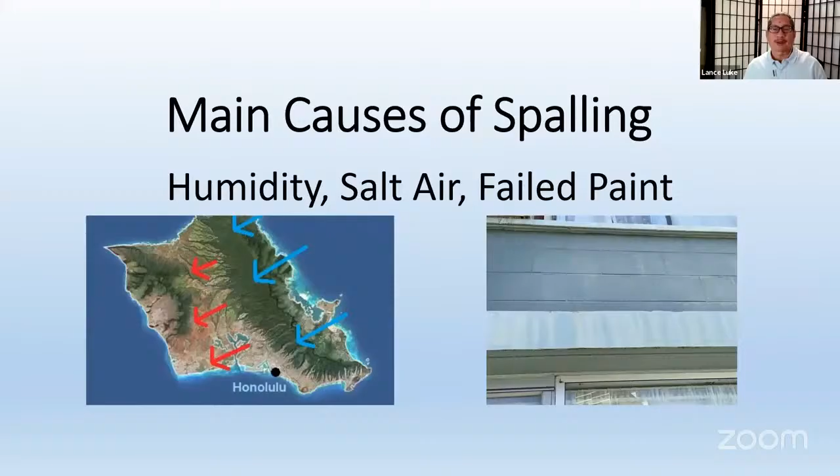I took chunks of concrete as an experiment and set it in little pans of water, and eventually the water soaked up into the concrete rocks that I had as a sample. So I'll give you another analogy: let's take a car. You have a nice Mercedes with new paint, and if there's a scratch on the paint that is not touched up, guess what? Where the scratch is, it starts rusting. And that's why full coverage of paint or waterproofing is the best thing for a concrete building.

So how do we determine whether there's spalling of the buildings, or let's say we know there's spalling, but how do we determine how much spalling there is and what the cost is to repair the spalling? So there's what's called a condition survey, and the survey is a method to determine the quantities of spalls at a particular building. And there's different ways to do surveying, and it's kind of simple in one hand, and on the other hand, it may not be so simple.

But the objective is to get a good snapshot of the condition of the building with respect to the various spalling conditions. So once all these spall areas are identified, those are all quantities, and we put all the quantities together, add them up, and we can determine basically what the cost is by the number of quantities for different types of spalling. So let's talk more about that. The inspection methodology to determine the survey condition.

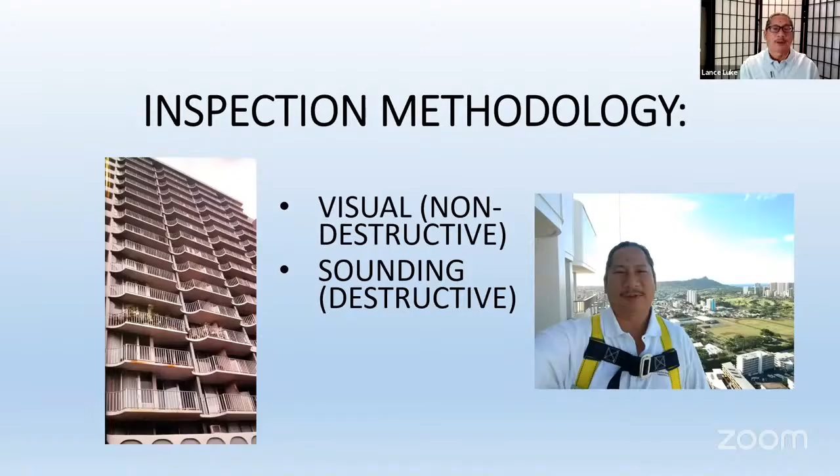So we gather all this information and compile the results and total everything and come up with an approximate number. Now, I'm not the contractor that does the work, but when I manage construction projects, I do my own estimate. So when I do get the contractor's proposals, I can gauge whether they're far off or whether they're within the ballpark based on what my own number is. So it's like a cross check. If I don't do that, I'm not going to have a clue whether these numbers from the contractors are correct or they're way off. Okay, so we're going to compile all the results and we're going to come up with some numbers.

So right now, let's take a tour of a building to see how we gather the data on spalling concrete. So this is kind of like a field trip within a webinar. So types of spalling by location. And believe it or not, there's different locations and types of spalling. And this is where the fun comes in so that you guys know what we're talking about. And when the contractor bids, you know exactly what he's bidding on and what he's talking about. And it's not Greek and it's easy to understand.

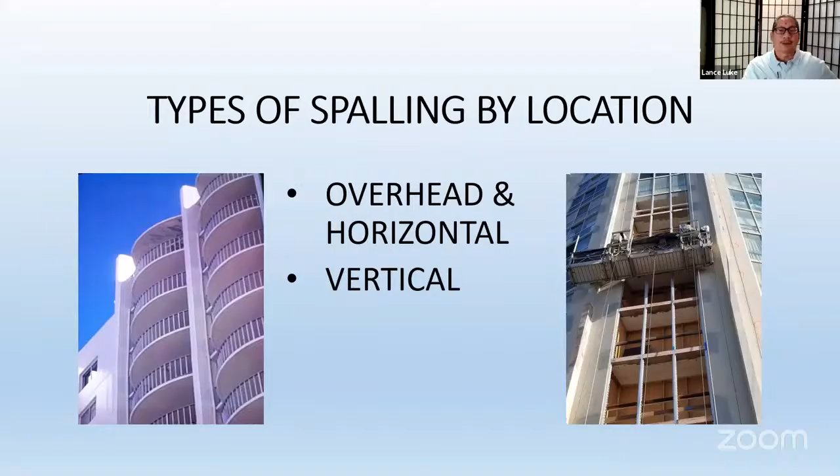Okay. Now, there's two different types of horizontal spalls, and one is called a partial depth, and the other is called a full depth. Now, it's pretty obvious, but you take a 4-inch or 6-inch walkway concrete slab, and if the spalling repair doesn't go all the way through, in other words, it's maybe the first inch or first 2 inches of the surface, horizontal surface, that's called a partial depth repair. Why? Because it's only partial, it's not total and full.

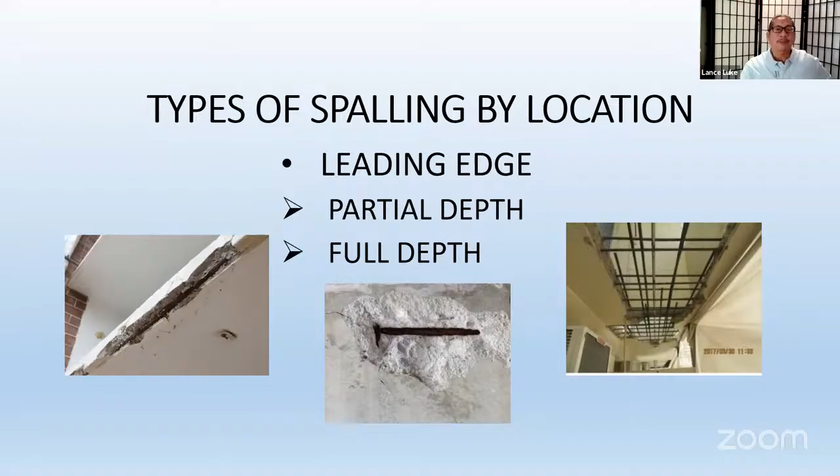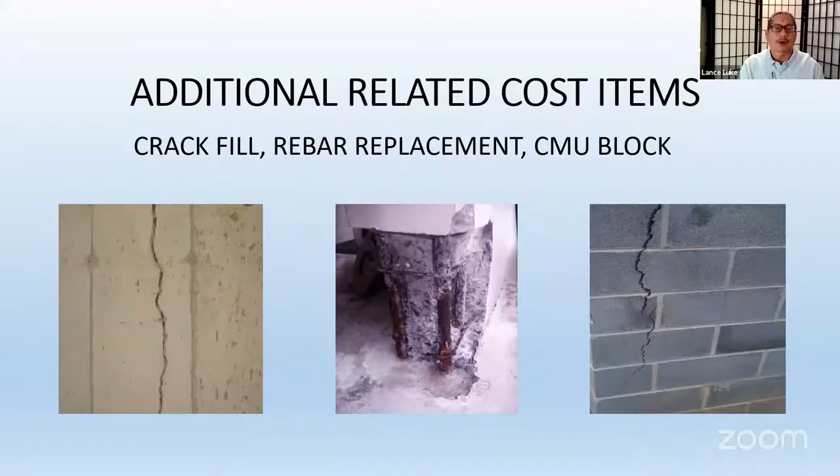Also, CMU block. We have block walls. You have a block wall, and there's cracks in that, and it's spalled. So we would need to repair that as well. And by the way, some older apartment buildings, office buildings are made of CMU block and not solid concrete. But the spalling repair is basically treated the same way with respect to figuring out what the cost is. The method to do the spall repair is a little different on each item.

I think I missed one. Okay.

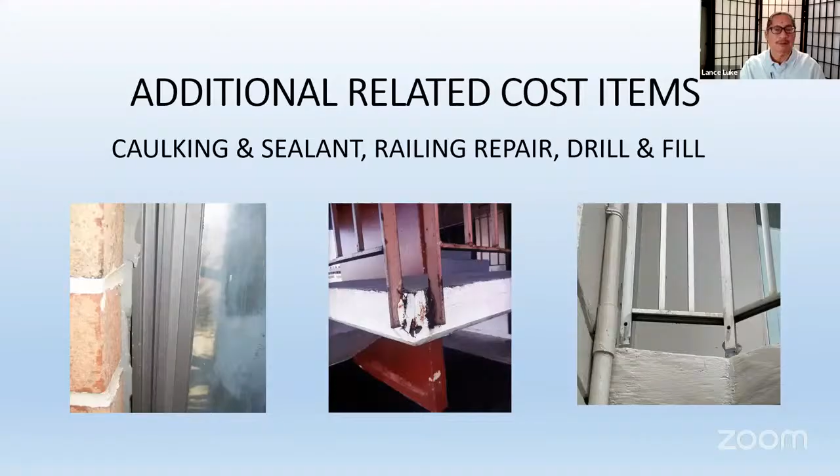Let's talk a little bit about base bid versus unit costs. Okay, so let's say we have contractors go to our building and say, take a look at our spalls. We want to get your proposals. So the contractors, let's say you call 3 contractors, they come in, they look around, and then you get a proposal from them.

Okay, beware of the lowest bidder, because it may not be as it seems. The price could be low, and that bidder could be the lowest bidder because he bid on a lower quantity than the other bidders. So common sense dictates that low quantities result in a low bid. Now I'm not saying do not accept the lowest bidder as your contractor. What I'm saying is to be aware of the bids.

It has to be apples and apples. It cannot be an apple and a lemon when you're comparing the bids. And this is very valuable information that contractors may not tell you. So let's say we have 2 contractor proposals, and which one is the lowest proposal? Okay, good. Someone said, oh, wait a minute. Can't you count, Lance? You said 2 contractor proposals, but you have 3.

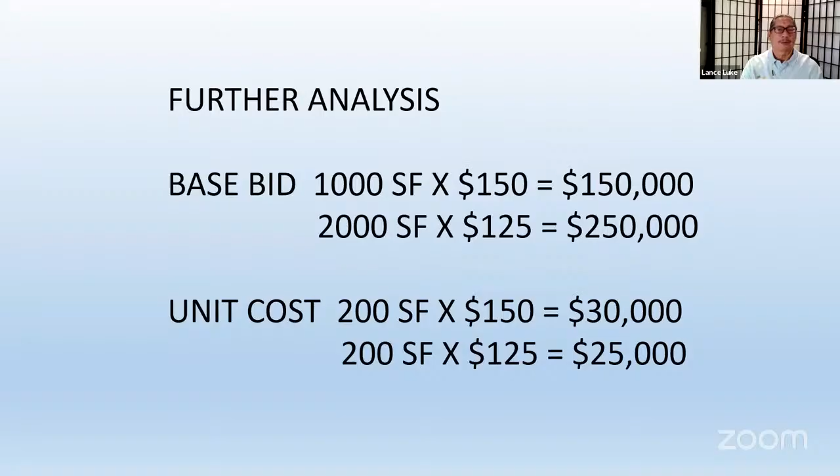Let's talk about concrete specifications. And this is another important factor. So you don't just have the contractor go there, chip out concrete, and then patch it with new concrete that he bought at the hardware store. That's why it's critical to have specific concrete repair specifications. There's industry standards, which is general acceptable industry standards, and there's various associations that are specific to concrete

repair and concrete construction. There's American Society of Concrete Contractors. There's American Concrete Institute, ACI. There's ICRI, International Concrete Repair Institute. And when I see bad concrete, I cry.

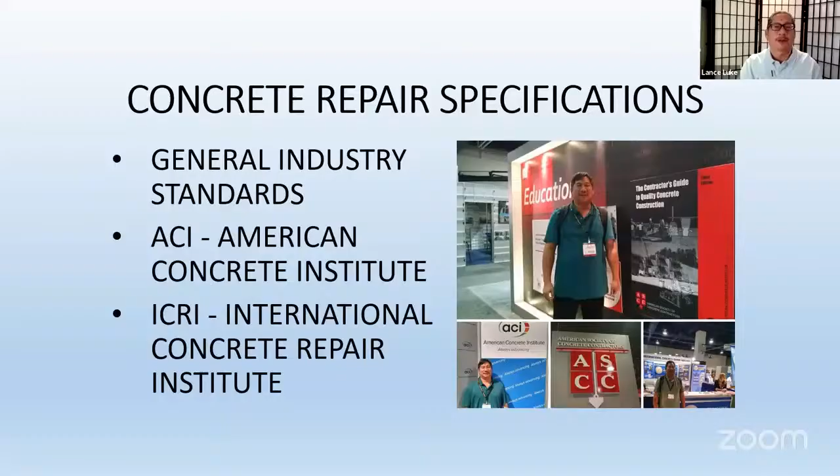So it's key that the contractor follow the specs and don't just hire the contractor. Make sure you have specs written as far as what they're supposed to follow. Okay. In addition, and we're going into the nitty gritty now, there's a demolition and chipping protocol. And what is a protocol? Well, they don't just go and start jackhammering away. So if you look at the photo on the left, it's a photo of a leading edge with a lanai, and the railing is loose.

But what I want you to learn is that if you look at the photo closely, they're ready to pour back new concrete. Now, is it saw cut to geometric shapes? No. If you look closely on the left of that middle section, it's all not even. And so there's no way to pour new concrete back and have it really bond if you don't have an even cut. As opposed to the area on the right, to the right of that rope hanging down, and that's saw cut. So what I normally specify is the contractor mark areas that they're going to cut out and saw cut it. They don't just haphazardly start jackhammering away at everything.

Also, demolition 3 inches beyond the corrosion. So if you see corroded rebar, don't stop there. You measure 3 inches from that corrosion and demo out, even if the concrete's solid, because we want a good bond.

The photo on the right is of me at the World of Concrete show. I entered this contest to actually mix concrete and fill it in and smooth it out. And it was a $1,000 prize. And guess what? I was second place and didn't win anything. But the guy that won turned to me and said, "Hey, good competitor. Thank you. Are you a concrete finisher?" And I said, "No, I'm an engineer. I don't even work with concrete. But I wanted to know how it's done, and I know how it's done."

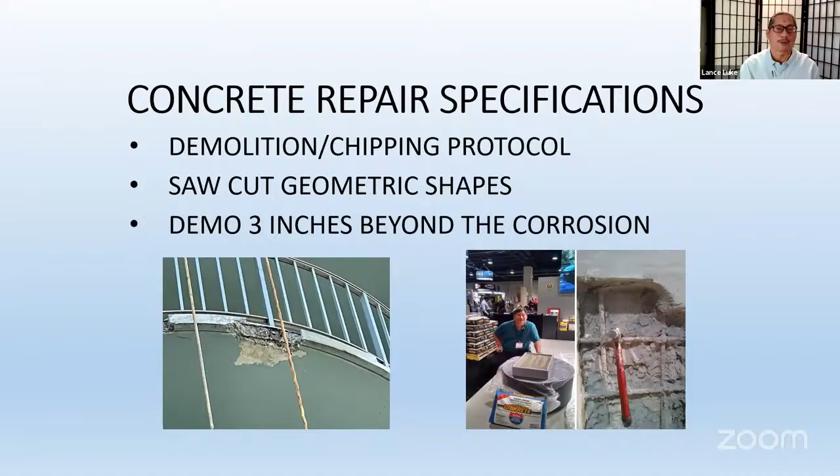So if you look at the photo on the right side, that's what mine looked like when I was partly done. So in order for me to inspect concrete, I've got to be able to know how it's done. So that's the reason why I entered the contest. Well, I also wanted to win $1,000.

Okay, so some more concrete repair specs. There's rebar replacement protocol. What is a protocol? When do we know when to replace the rebar? Well, if you look at the photo on the left, the rebar is severely corroded. If you look at the rebar right at the end, and you hold it and you're looking at the end of it, that's called cross section. If you're looking right on, and the cross section is corroded away 15% or more, that's a determination that you have to replace the entire rebar.

You can't save it. Don't grind it and try to save it because you're cheap. That's not going to do it. Also, you have to remove all the corrosion on the rebar. If you look at the photo on the left, if you just use a metal grinder and grind all the rebar that you see and it's shiny, is that good enough?

No, you have to chip behind the rebar so that you can go behind the rebar with a brush and apply corrosion treatment. If you do not chip behind the rebar and you just patch the top, in 2 years the corroded rebar in the back will start spalling concrete again, and then you're back to square one. Okay. So the corrosion removal and the treatment: don't just remove the corrosion and then fill it back with concrete. You've got to apply corrosion inhibitor to treat every inch of that rebar so that it doesn't get corroded again, or it takes a while for it to get corroded.

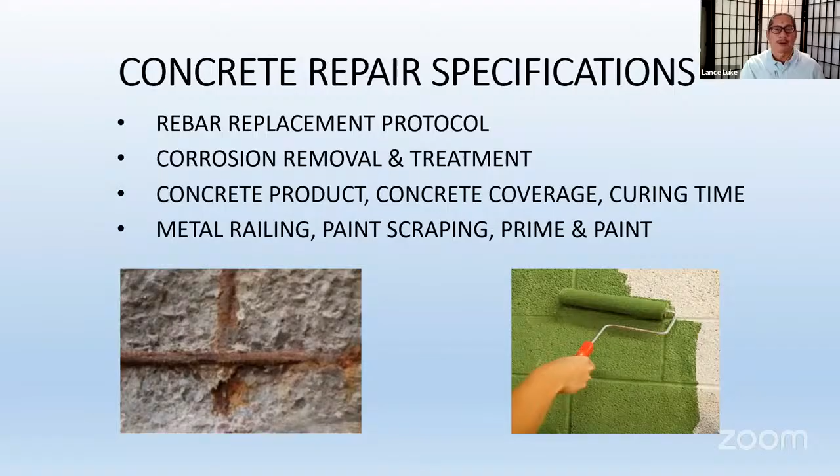By the way, I'm not happy with that green color. It's like an army worm green. I don't like it. I don't know about you guys.

Proper contract documentation. You don't just hire the contractor, he goes and fixes it, and he goes, here's the bill. Okay. So here's what you should require at every spalling project. In addition to documentation of the areas that need to be repaired, I want to see a photo beforehand, a photo during the spalling repair, and a photo after. So if you look at the photo on the left, it's obvious that there's a horizontal crack there. It's a leading edge spall right at the base of the railing. And this is a photo as is, before any work's done.

Then they started chipping out the area, and this is a close-up of the same area showing the rebar where they cleaned it up. So it looks pretty good. Okay, although there's still some concrete cracks around there, they got to dig it out some more. And then they formed it and they poured concrete.

So the photo on the right is after they took out the form of the concrete, so we can see the repair. What is critical is the before and during, because the during is going to have the photo showing the condition of the actual spall area, and they have to take measurements in order for me to cross-check how much they're billing for. Okay.

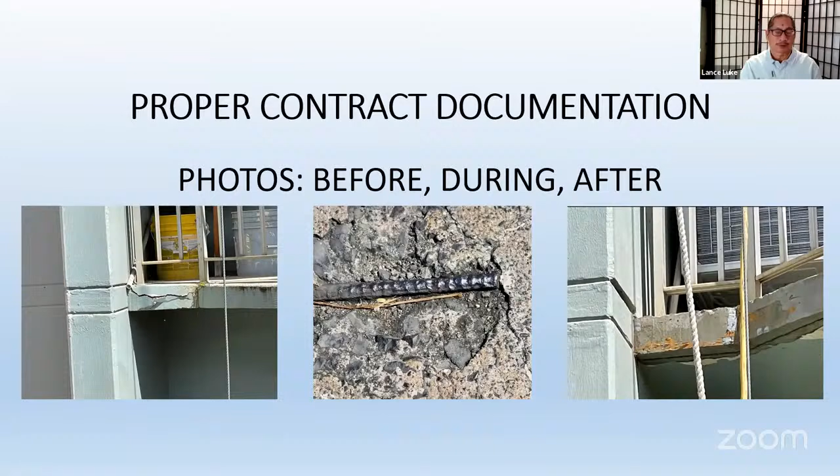Okay, this is full documentation of a spall repair. This is the right way to do it. If a contractor doesn't submit all this documentation, how do you know they're not overcharging you if you can't prove for each spall area how much concrete they took out and how much they patched? Okay, you don't know.

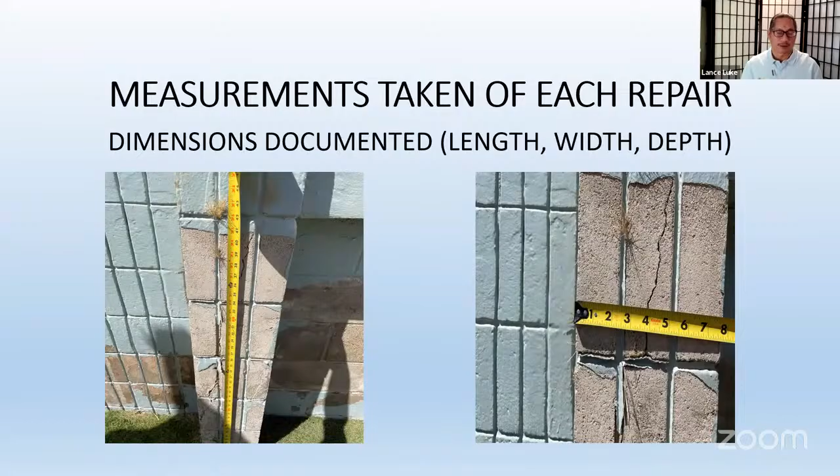Also, description of location, spall type, drop number, stack number, and condo unit number. So when they're doing the repair, they need to list what the unit number was, what the type of spall. So unit 201 leading edge spall was 3 linear feet times X amount per linear foot. And I double check all that.